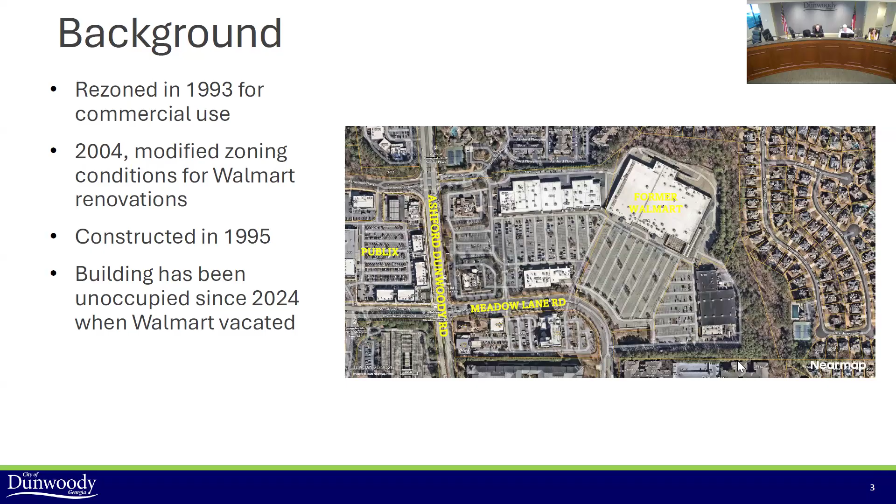So this was rezoned back in 1993 for commercial use. That was when the original shopping center was built and when the original Walmart went in. And then in 2004, Walmart made some renovations, and as a result of those renovations, they modified their rezoning again. So from both 1993 and 2004, there are zoning conditions on this property. The building has been unoccupied since 2024 when Walmart vacated, and due to that vacation, there's now additional interest in the site.

But they're proposing to move into the site almost as is, with a couple of modifications. So they'd be reusing the existing building. One of the changes they would like to make to the site is to modify the front facade. It would just be mainly a paint refresh and changing some elements of the facade to change around the entrances.

The most major change they're making to the front is they're requesting to add a drive-through, which would service their in-store pharmacy. That drive-through lane would be parallel to the front facade of the building.

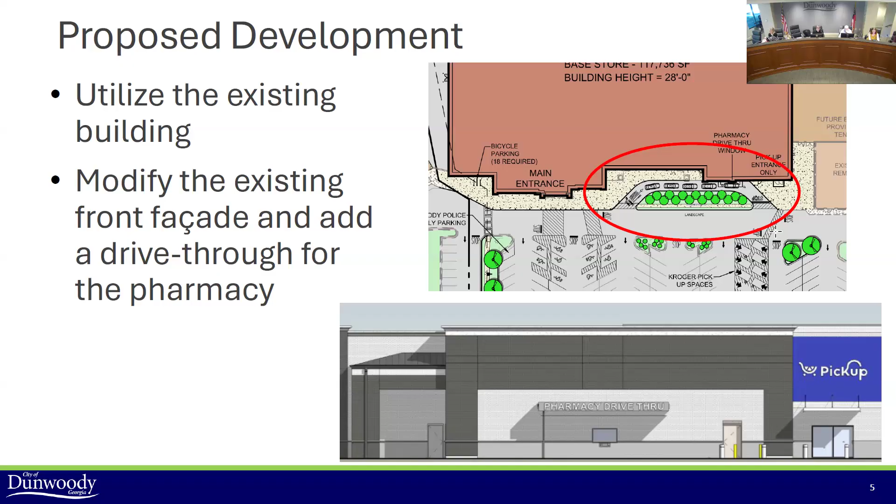I've zoomed in on their site plan just to the front of the building to give a better view of that drive-through lane. It would essentially come in and have a stacking lane with capacity for 5 cars, and then a pickup window covered by a small canopy. It would form a little horseshoe, and a majority of that lane would be screened with vegetation. On the bottom is just a photo of the elevation of what that would look like.

The next part of the request is for the construction of a gas station. This would not be a typical gas station with a convenience store. It would essentially just be a canopy to cover the gas station pumps, with a small kiosk for an employee to have shelter. That's the layout of the gas station, and it would be pulled up closer to Meadow Lane.

If you're familiar with Meadow Lane, it has the sidewalk and then essentially a berm. So up at the top of that hill, pushed a little bit back in front of the Walmart, would be the proposed gas station.

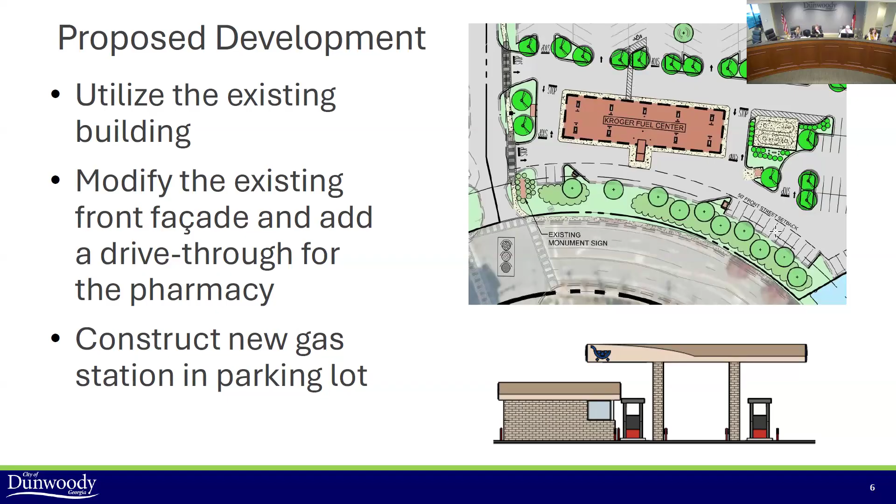They're also proposing to make some parking lot improvements, including new landscape islands, new tree plantings, as well as a new pedestrian walkway from Meadow Lane to the front of the store. There's currently no direct route of travel for pedestrians that's separated from the cars, so we find this to be a nice improvement to the site.

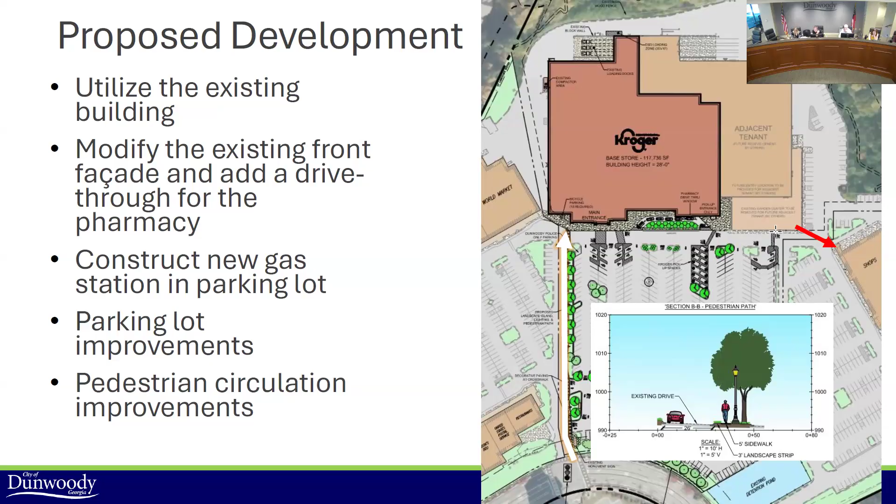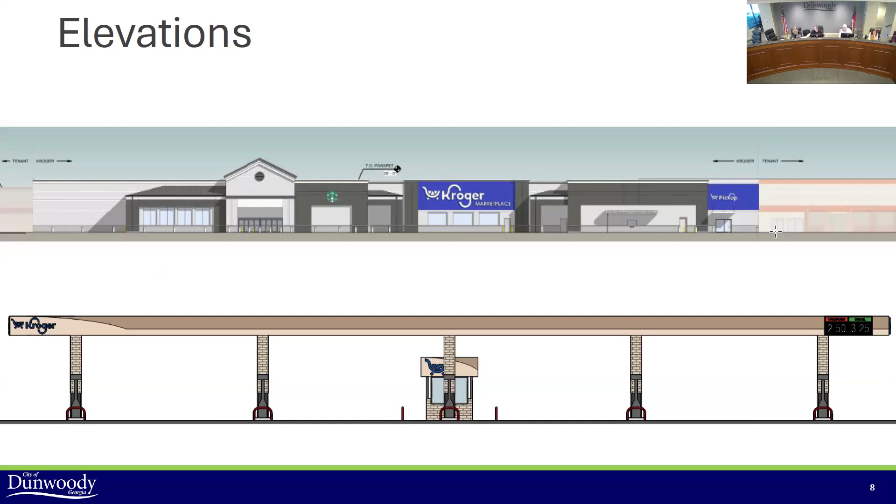So now I want to break down the requests now that we know what Kroger is proposing. Because this has layers of those old zoning conditions from 1993 and 2004, you have certain rules and regulations that dictate how the property can be used. You also have the general zoning ordinance, which requires any drive-throughs to have a special land use permit. Also, because they're utilizing the existing site and not scraping and building new, that's caused some friction with some of our other zoning requirements, so they're requesting some variances as well.

I'll first go over the rezoning, which is essentially to modify those zoning conditions from 1993 and 2004, replacing them with a set of conditions applicable to this project. It would include replacing the site plan, because currently the site plan that dictates this is a little over 20 years old. It would also remove a condition restricting gas stations and just allow the zoning code to dictate what uses are allowed here. The project is zoned C1, and gas stations are allowed in C1 by right, but those zoning conditions prevent a gas station, so they're requesting to lift those.

They are also requesting to remove the time restrictions on deliveries, and to remove parking requirements. The special land use permit is for a drive-through, and the variances are just from general zoning district standards—I'll get into those a little bit more.

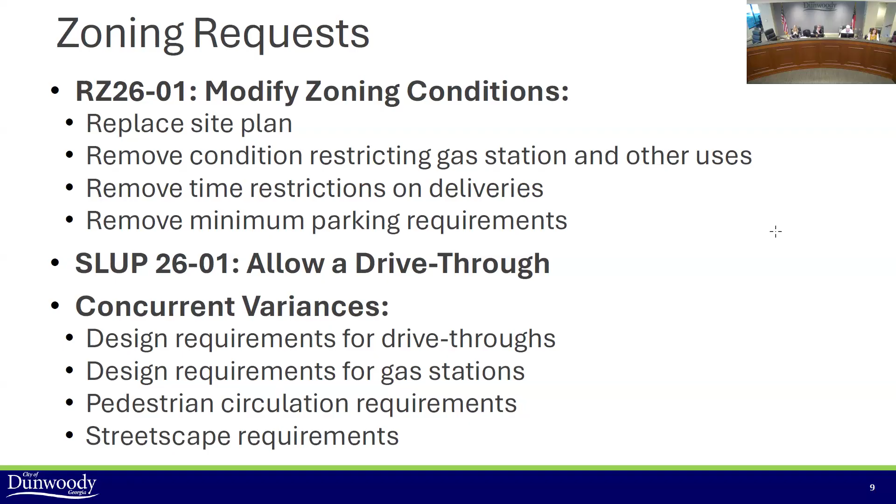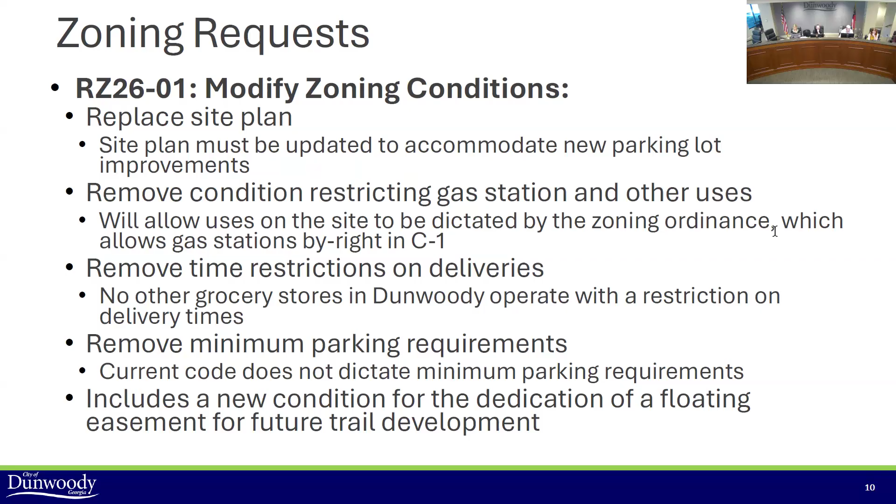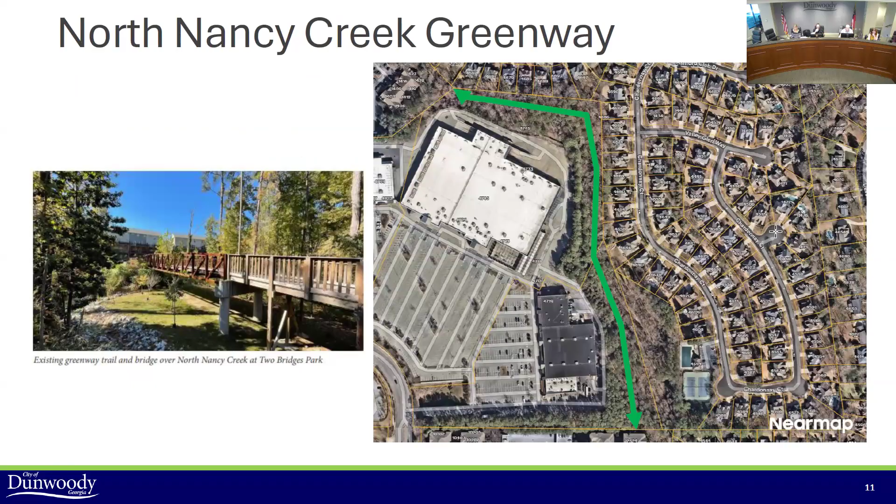For the special land use permit, any drive-through in the Perimeter Center requires special permission. Typically, when you think of a drive-through, it's something like a drive-through restaurant or a bank, and we have requirements to control those, just because those are the types of things that can have impacts on sidewalks and roadways.

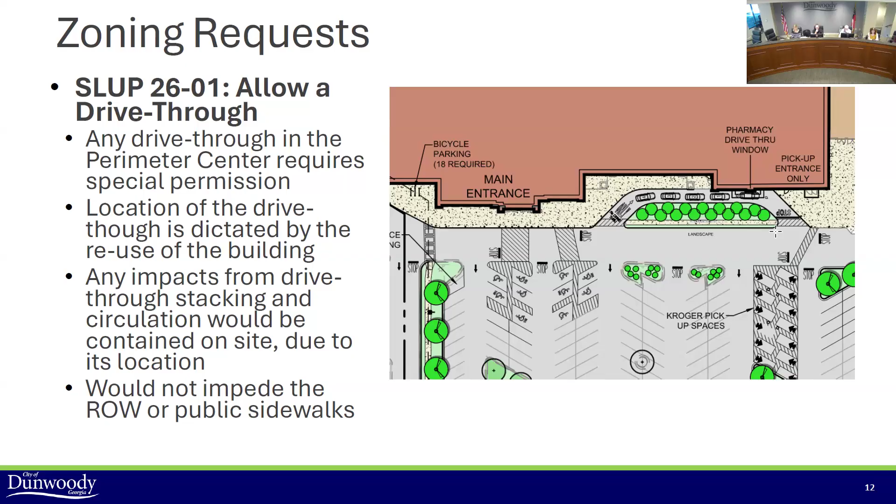Especially when they're closer to the street or adjacent to the street, in this situation we do find the drive-through appropriate. It is pushed back from the street, and we believe the site is large enough to accommodate any adverse impacts. We don't see it impacting the streets or the right of way, and so we are recommending approval on that.

For the concurrent variances, I'll walk through these quickly since there are four. For the design requirements for drive-throughs, our requirements in the Perimeter Center are very prescriptive, predicated on one building type essentially - a freestanding bank or restaurant pulled up to the street - and those requirements tell them to build the drive-through behind the building. But this model doesn't meet that because they're utilizing the existing building, and it just doesn't fit those design requirements. Same goes for the gas station - those rules are predicated on having a convenience store you pull up to the street with the gas pumps behind it. But again, this is just a different product type than what the code anticipates, so they're requesting relief from those items.

We also have pedestrian circulation requirements. They're making significant pedestrian circulation improvements. There's just one part of the site they don't feel they can provide a pedestrian connection for, but they are making some improvements towards that.

For the streetscape requirements - if you saw in the earlier picture, and I can go back to it if needed - this property only has a very small amount of frontage. The shopping center is split into 3 different parcels, and it wouldn't necessarily be rational to require streetscape improvements on such a small stretch of roadway. The Public Works Director acknowledges that, so they're requesting relief from our streetscape requirements, but as mitigation they are providing an easement for future trail development, which would be a great way to extend from Two Bridges Park up to the shopping center.

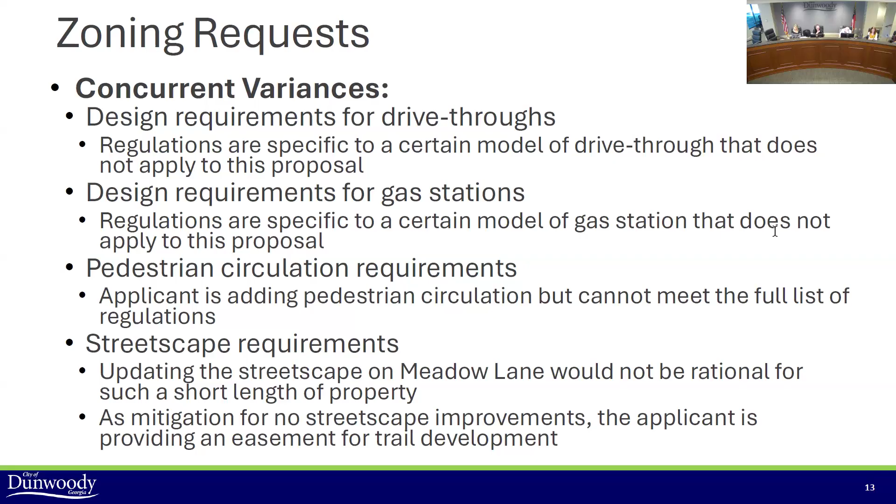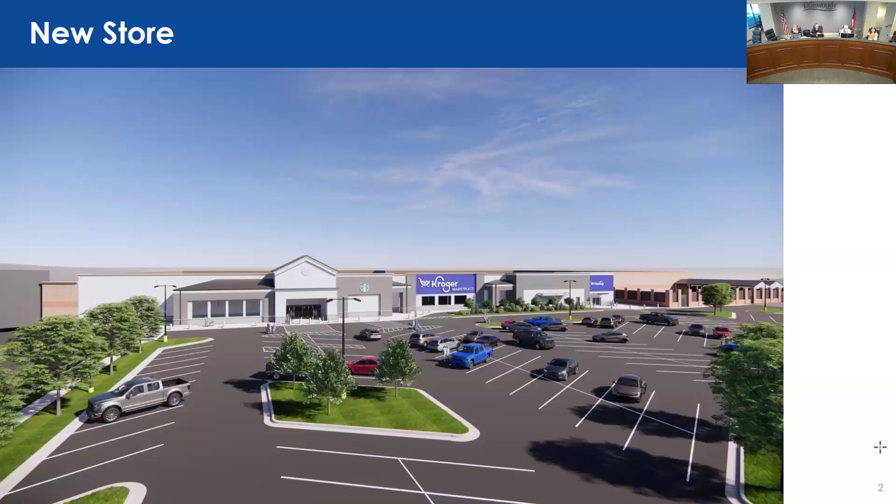Good evening, my name is Laurel David with the Galloway Law Group. I just whispered into Madeline's ear - she stole most of my slides, so my presentation will be quite brief. She covered, as she usually does, most of the things I wanted to make sure got covered, and her staff report, as usual, is very thorough. But there were a few things I wanted to bring to your attention. We have renderings, which she did not have, which I think will give you a better idea of what the finished product will look like as opposed to 2-dimensional elevations.

I also wanted to tell you a little bit about Kroger. This store is going to be a marketplace, so it will have departments that some of the more older traditional Krogers do not have - such as, well, I know my Kroger has plates and kitchen things, in addition to what you'd normally see. There'll of course be a Starbucks there, they'll have the delicatessen with specialty cheeses and meats, and they're also going to have a baby clothing department.

Kroger is also very involved in philanthropic initiatives. They have a Zero Hunger, Zero Waste plan. Since it was devised in 2017, they've donated more than 3 billion meals and donations of in-kind and surplus food to a value of about $1.3 billion in charitable giving. They donate money and food to help establish and support school food pantries and nonprofits that address food insecurity. They also aim to recycle about 90% of their construction waste so it doesn't go to landfills, and they're very active in supporting community groups, neighborhood groups, and nonprofits.

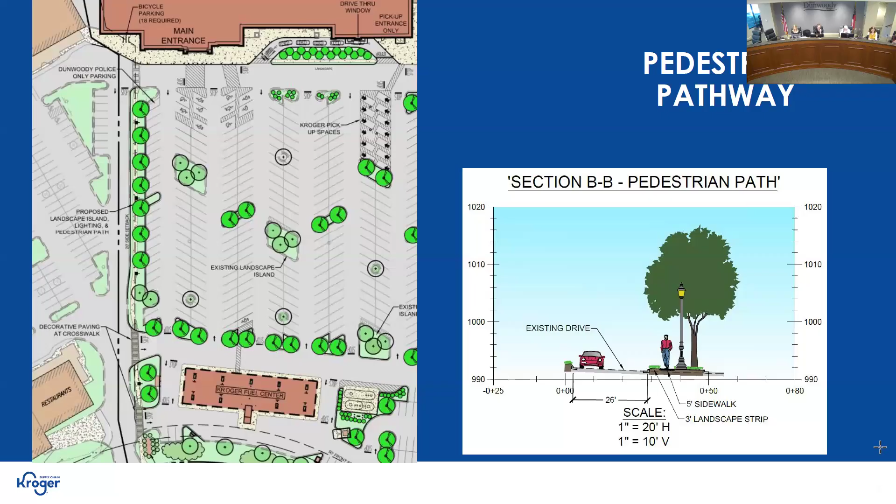With the addition of the landscape islands you can see there, the lot coverage will be about 75%, which I think for a piece of property this size is actually pretty good for commercial development. They're also reducing the amount of parking that's out there now by a total of about 100 spaces - there's 626 spaces there now.

And here's a rendering of the pedestrian pathway. They're also going to have lighting, not quite like street lighting, but that's the idea, to make sure that anybody walking there feels secure and safe.

The fuel center was also designed with safety in mind. You can see the fuel tanks, the oval-shaped circles to the right of where the Kroger canopy is shown in red. Then there's the hashed area that allows trucks to pull over and make their fuel deliveries there. They won't be in the circulation of customer traffic.

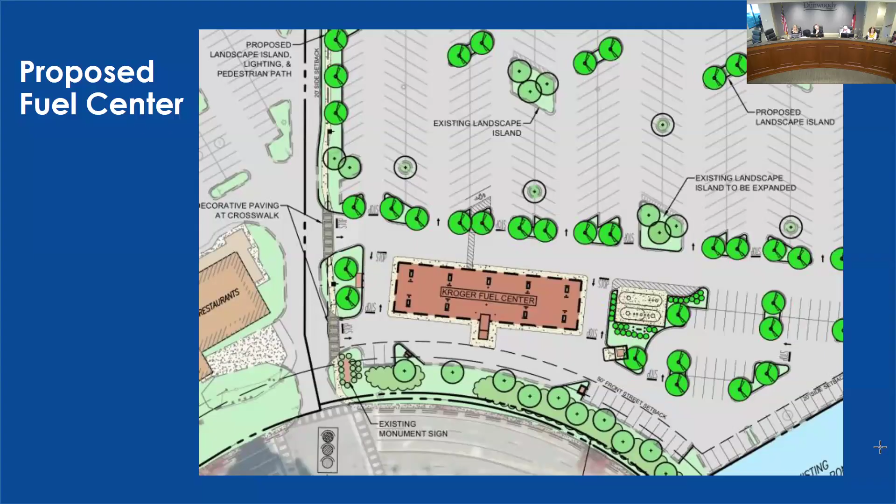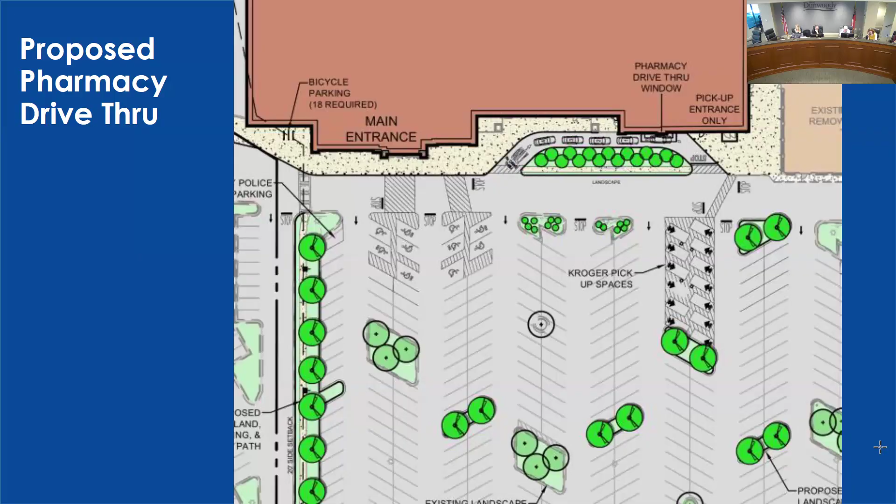The pharmacy entrance was also designed with safety in mind. You can see the way that it is oriented, it's one way. There's clear visibility for cars entering and exiting. There will be clearly marked pedestrian crossings at the entrance and exit. The landscaping is there not just to mitigate visual effects, but also to create a buffer between the pedestrian and the cars in the drive-through. And this is a rendering of that area.

So with that, I'd ask for your support, and if you have any questions. Thank you.

Okay, for the commissioners, do we have any questions for either one of the presenters, starting on my left, Commissioner Cameron?

Yeah, for this, we do kind of like the big questions now. I would say let's do the public hearing first. You want to do the public hearing? Okay, and then the comments.

Okay, then we will now go with a public hearing. First up, Frank, and I hope I pronounced this right, Capon? Am I correct? Okay, all right.

Sorry, Commissioner Moss, let us do this. I think both of the little cards that I handed over to you were in opposition. Let us do this because we have 10 minutes for and 10 minutes against for each one. If you wouldn't mind opening the public hearing first for the people wanting to speak in favor, in case there are any, and then move on to the opposition.

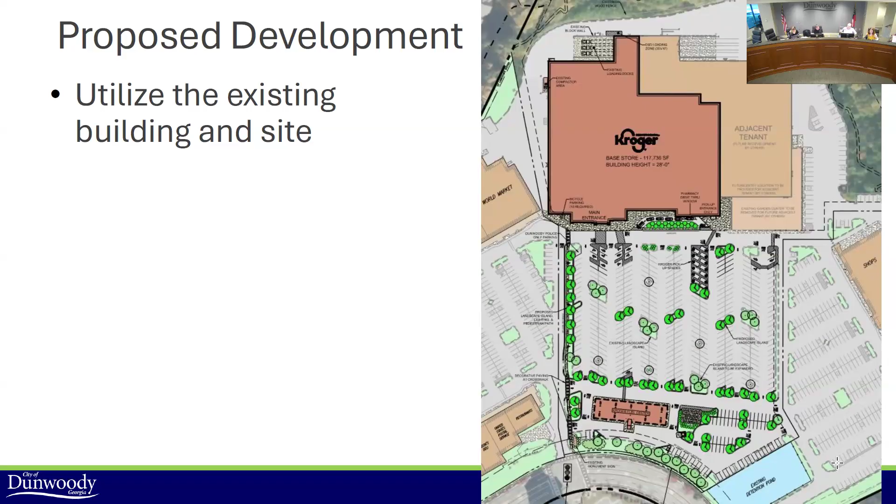Number 3, a motion for the SLUP as well. Yes, I'm going to that one. We've already covered the information on that, correct? So essentially, I don't have to give another presentation unless you guys have specific questions about the special land use permit, but we'll still need to open the public hearing for it. Then you can do discussion and make a motion.

In regards to Special Land Use Permit 2601, I'd like to open the public hearing. That will last for 10 minutes each for for or against. Would anyone like to speak in favor of this special land use permit? Hearing none. Would anyone like to speak against the special land use permit?

Yes, sir. Frank Capek, 4646 Chardonnay Court. This touches on some of the questions you asked earlier. In the event that there are more than 5 people waiting at the drive-through, what happens to the flow? It seems like it will either obstruct traffic waiting on the right-hand side to cross over to the left, or potentially block traffic entirely if people end up queuing beyond the capacity of 5 that there's room for in the lane. It seems like that would be important to get clarity on. That's it, thank you.

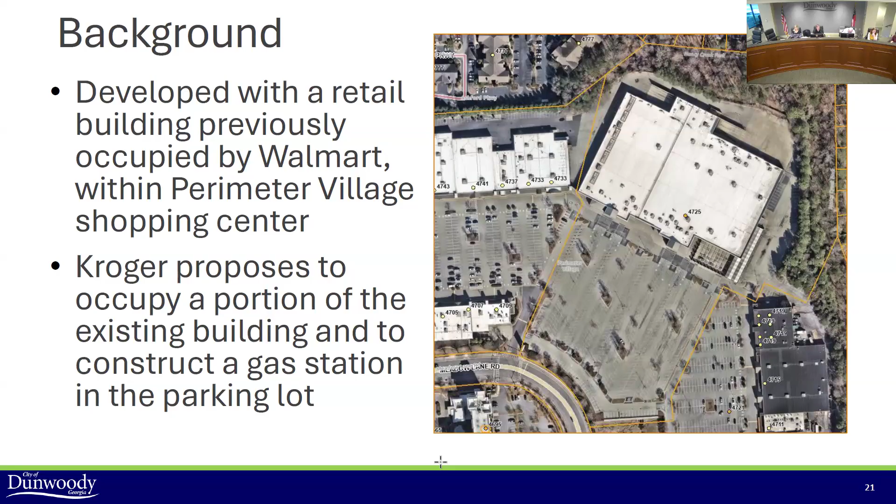So the sign code and the master sign plan will provide the only signage regulations for the property. Kroger is requesting a major master sign plan in order to exceed the maximum count for 2 sign types and to exceed the maximum sign area for 9 individual signs. They're proposing to construct 2 wall signs and 1 canopy sign on the existing building, as well as to add some gas station signage. They're also proposing 3 monument panel swaps on existing monument signs for the Perimeter Village common development and 1 new monument sign for the subject parcel, and none of these signs require exemptions.

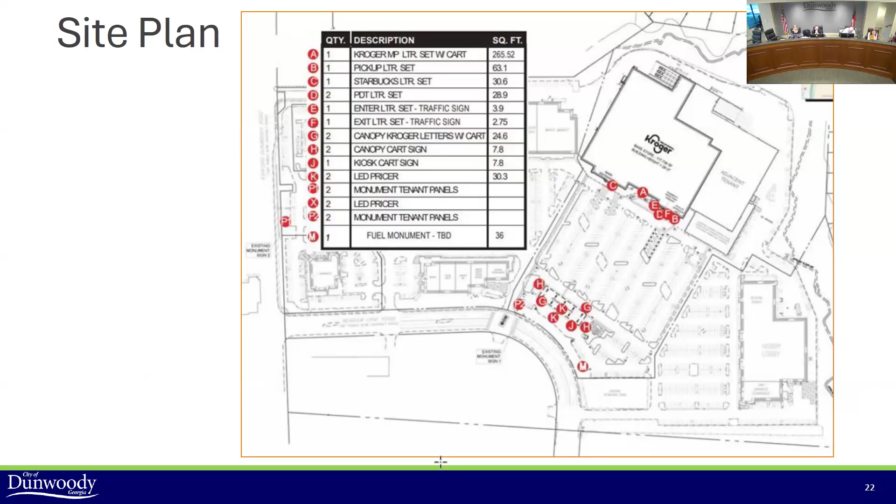So the applicant is proposing to install 2 building wall signs, signs A and B, on the existing building. Sign B is in compliance with the size requirements, but sign A will be a maximum of 407 square feet, which exceeds the maximum allowed size of 180. While large, these signs are very similar to the previous Walmart signage. Additionally, 2 building signs on the same facade exceeds the maximum sign count of 1 per facade.

Also on the existing building, the applicant is proposing a 28.9 square foot canopy sign, sign D, that'll indicate the pharmacy drive-through. The size of canopy signs is determined by the ground floor glazing over which the canopy is located, and this one is not located over any ground floor glazing.

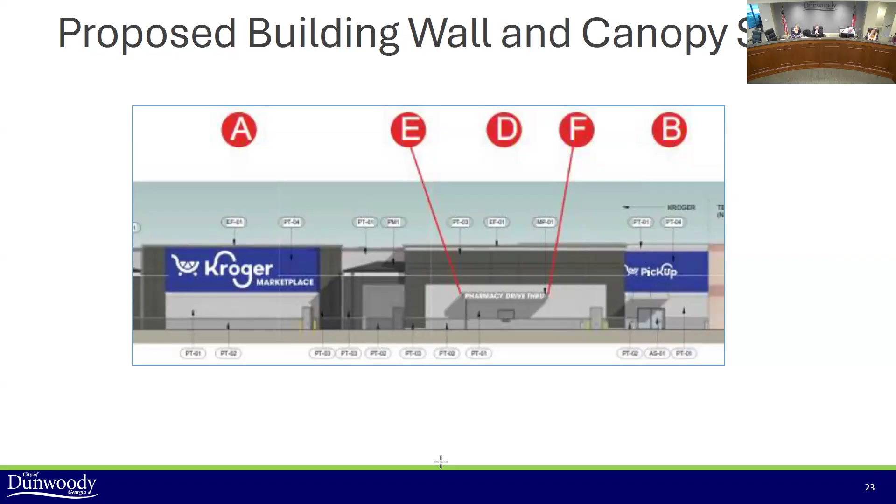As part of the construction of the gas station, the applicant will install 5 signs on the gas station canopy and 2 signs on the pump island. The maximum size for gas station sign is 6 square feet, and all of the proposed signs exceed the maximum allowed, ranging from 7.8 square feet to 30.3 square feet. Additionally, they're only allowed 1 canopy sign per street facade, and the gas station faces only 1 street, so they're exceeding that.

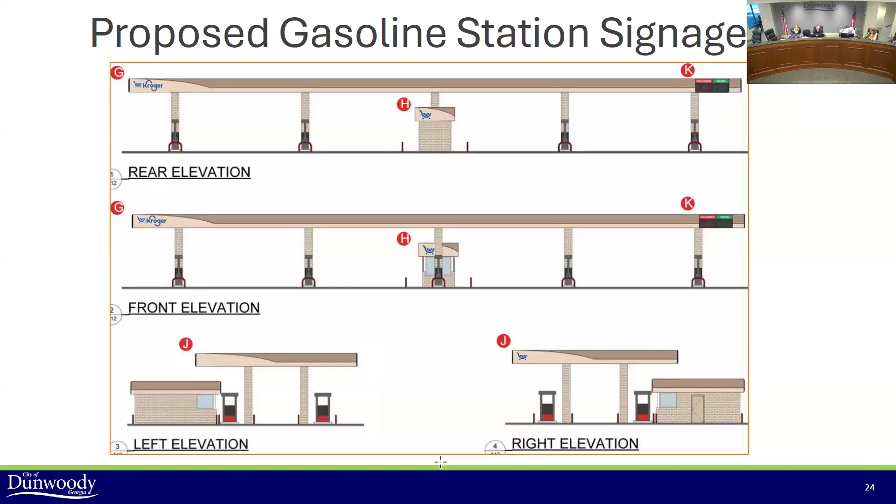So the color scheme is consistent throughout the proposal, using several dominant colors that are paired with complementary accent tones to ensure visibility and cohesion. All of the proposed signs use the same font family and typographic hierarchy to maintain brand consistency as associated with Kroger. All the proposed signage is constructed from durable, weather-resistant materials, and so overall staff finds that the major master sign plan proposal does provide visual consistency with the proposed and existing signs.

The topography of the subject property is a little unusual. The perimeter village common development slopes down approximately 30 feet from Ashford Dunwoody Road to the proposed Kroger building, which really limits visibility for the development. The development consists of multiple buildings with a mix of uses, creating the need for signage to indicate the location of each tenant. The existing building facade is large. A maximum size per sign of 180 square feet would look out of scale compared to the size of the facade.

And as I said previously, the proposed signs on the building are similar to the previously existing Walmart signs. But because of the multiple coexisting uses at a typical Kroger, supermarket, pharmacy, allowing 2 wall signs per facade and a canopy sign that is not located over ground floor glazing will permit customers to navigate the space more easily.

Staff also finds that unique visibility concerns exist for the proposed gas station that necessitate the requested code exemptions due to the positioning of the gas station. Unlike typical gas stations, it'll be surrounded by parking lots and commercial drives, necessitating clear signage for customers entering from those surrounding areas. The proposed signs are of a consistent size and scale to existing signs in the surrounding area. It's located near Perimeter Marketplace and Ashford Lane, and all of those signs are of a fairly consistent size and shape.

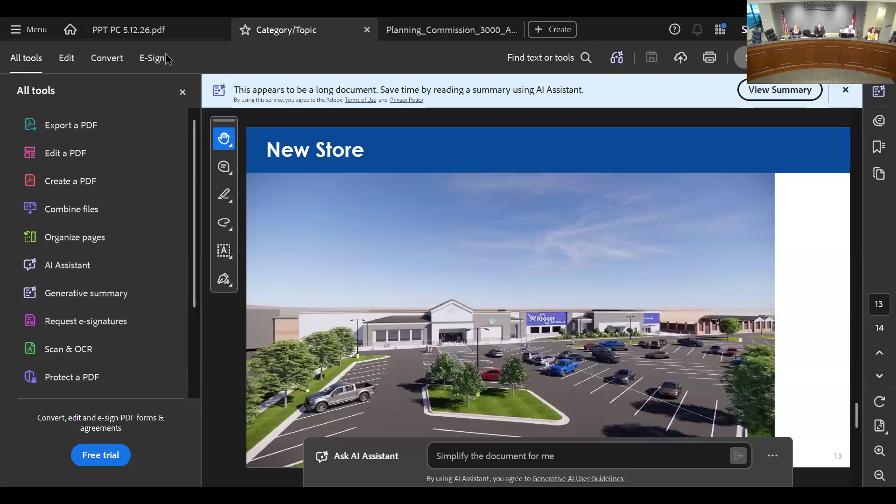Yeah, there was just a couple clarifications. Well, let me start by thanking Allegra for her patience. This version is revision number 6. We covered a lot of ground, a lot of changing things, a lot of meeting in the middle.

In terms of the sign plan, of course, it didn't help that our sign consultant had never done a master sign plan before, so she was very patient with us, and we were able to work out a lot of issues. I know that she pointed out that the big main sign is about the same size as what Walmart had, but I also wanted to point out that Kroger is kind of being penalized by the way that the sign area is measured.

Basically, you get one rectangle. So the word marketplace, because it's so long, is actually extending a huge blank area, which doesn't have any text on it. I was going to try this so you can see what I mean. So it's this area here, if you can see my cursor. The actual, if you're going to take it into smaller chunks, it would be about 260 square feet.

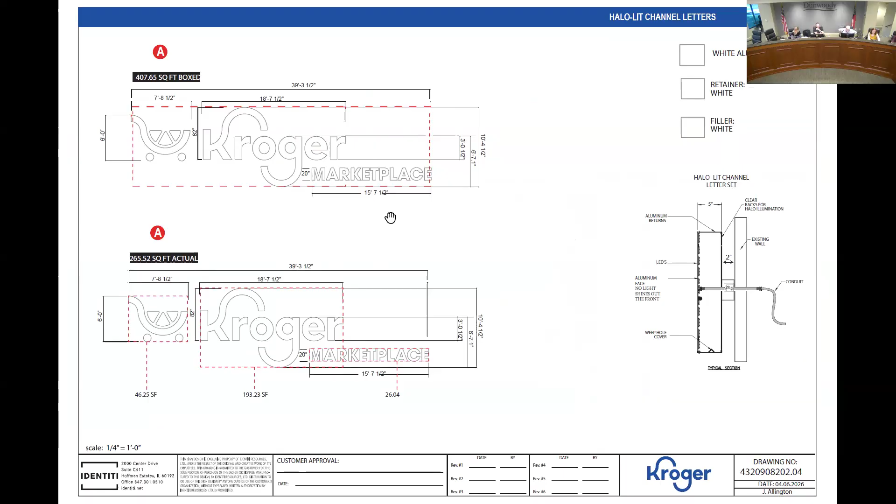As far as the monument sign, I think Allegra may have been out of town. Revision number 6 included a relocation of the monument sign. It's really kind of a placeholder somewhere near that intersection. We found having it down here was not going to fit with the grade difference and with a detention pond right there. But if it is approved as shown on the site plan, it can be shifted at an intersection administratively. We just can't change the complete intersection.

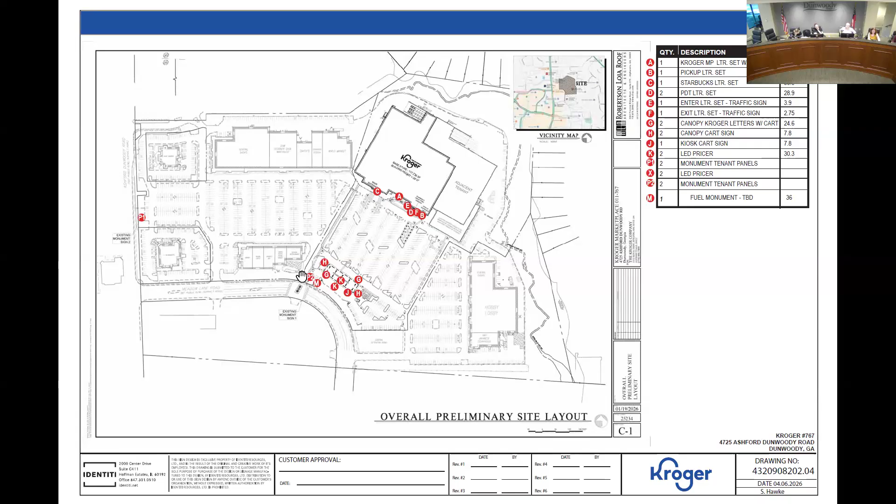And I would like to point out also that the reason for this sign was to be able to show the fuel prices. Sure, there's 2 monument signs out there now that really cover all the tenants, but an LED display or any type of similar lighting cannot be put on those signs. Those are legal non-conforming signs, so all you can do is change out the tenant panels. But in order to get the prices more visible on the street, the only way is with the monument sign.

And of course, we'll work with staff on an appropriate location that doesn't create clutter, and also the appropriate lighting. A shopping center of this size actually allows 10 monument signs, so at the moment there's 3, maybe 4 for the entire shopping center. So I don't really find the argument that there's excessive monument signs credible. We would ask that you approve it without the staff condition and allow monument sign M, please. Thank you.

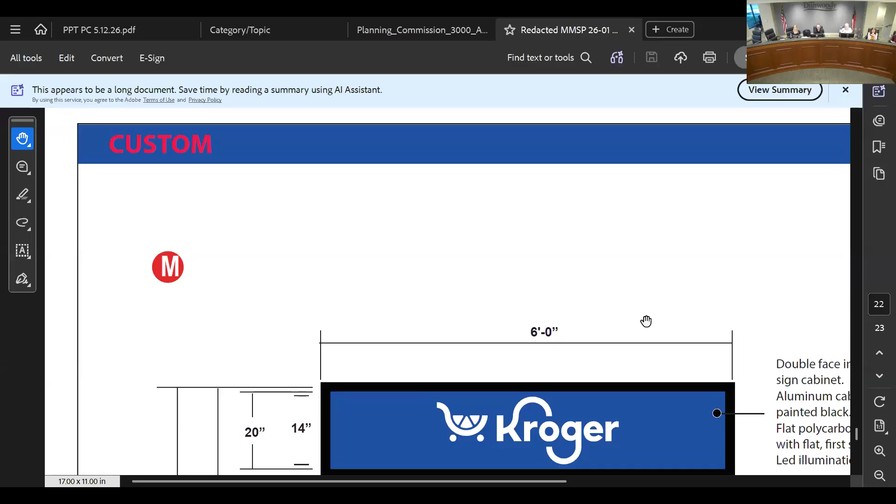I hope I mentioned this, but it probably wasn't clear enough—it's kind of a placeholder there. In fact, I'm not even sure it can go exactly there because there's an electrical culvert box thing there. We would be working with staff to find an appropriate location somewhere near that intersection.

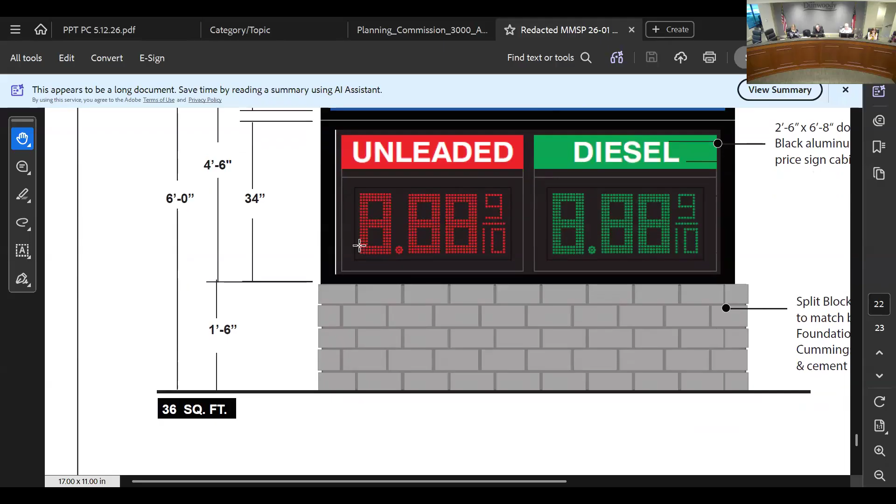Okay, and correct me if I'm wrong, but the signs on the canopy over the gas pumps also have the prices on the signage on top, on the canopy, correct? Correct. They're much smaller though, and I'm trying to figure out how to make this smaller.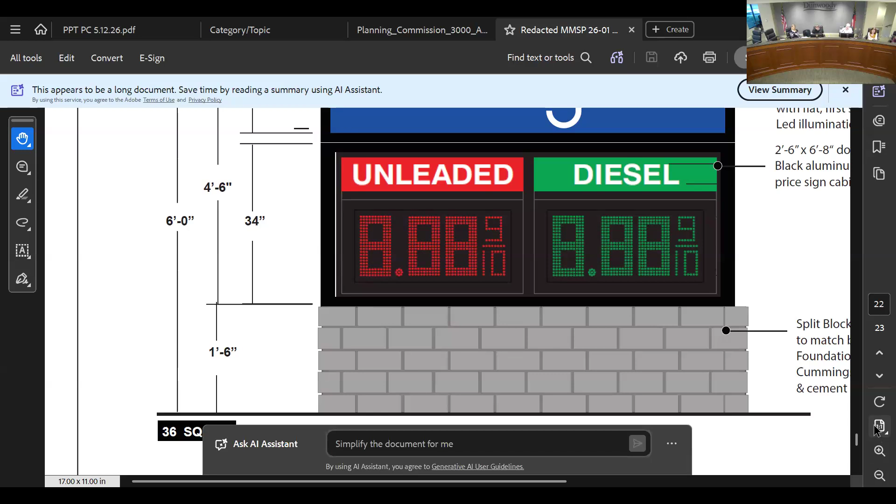Oh, there it is. Great, thank you—who knew you were going to be a computer expert for tonight? Yeah, they're 8x3, the canopy signs, and so you can see them. It's just this little bit up here in the corner.

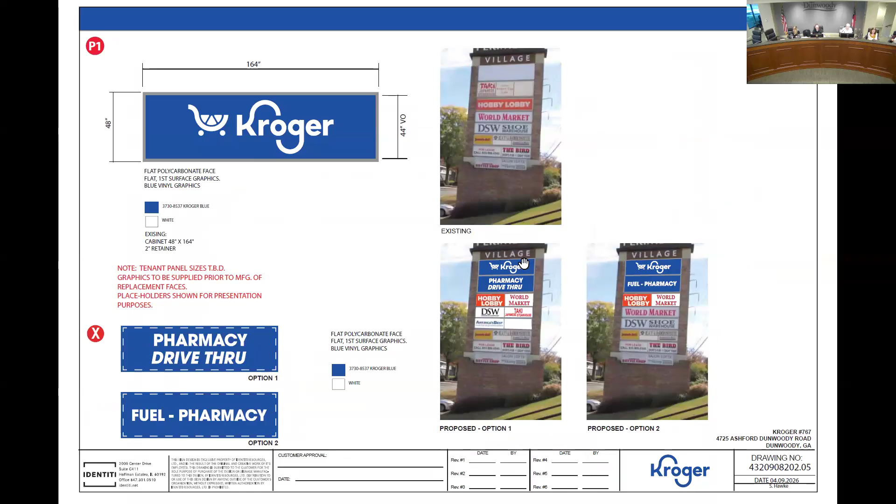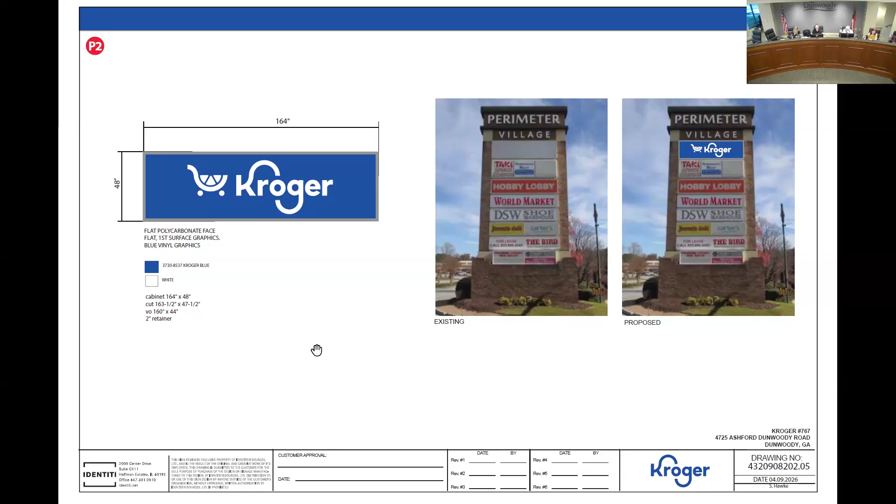And these were the P1 and P2 signs that you were talking about. Here's the existing two alternatives of possibilities of how P1 would change, and then P2—this is the one by Meadow Lane. So actually you can see that they tried to mimic the appearance of that monument sign with their proposed design.

Okay, I think that answers my question.

One question for staff—quickly, we're talking about the internal box lighting, and that was in regards to the fuel price. So if the fuel price is separate, that's EMC, Electronic Messaging Center, and that's allowed. It's the Kroger logo on top of it.

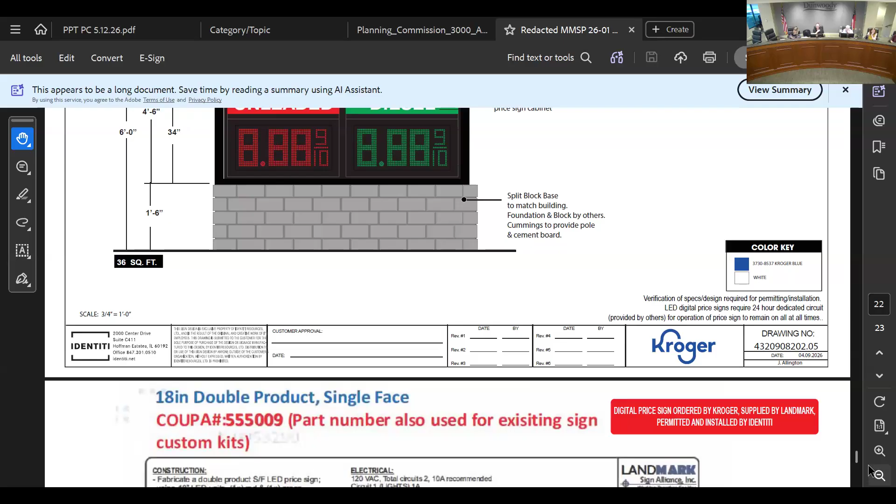And that is removed already, or would that be a condition we would need to make? That would need to be a condition, because there's no way for them to request that exemption. So it would just be something that they would simply need to conform to our code on that. Okay, all right, that's all.

Okay, regarding MMSP 2601, the applicant Kroger seeks a major master sign plan. Do I have a motion? Sure, I'll make a motion. I motion to approve MMSP 2601 for 4725 Ashford Dunwoody Road for Kroger seeking a major master sign plan with staff conditions.

That's good enough, I'll second. Okay, I have a motion to approve MMSP 2601 with staff conditions, and I have a second. Do I have any discussion?

My only question is, can they do something else about sign M, if the Kroger logo is the problem and not the gas prices? I don't know—I just pulled up the QT sign on Street View. I mean, I don't think it's that offensive if they can do something like that. That would be just my only discussion point.

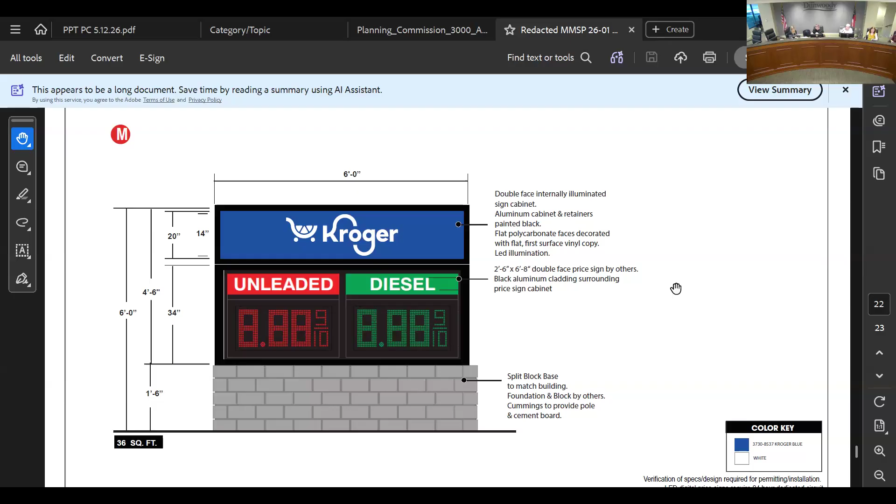Okay, on item number 5—would like to give everybody in attendance who was here for the Kroger meeting an opportunity to leave the chamber at this point.

Madeline, do you want to quickly go with folks and see if they have any follow-up questions? Yeah. All right.

Good evening, Chairman Moss, good evening commissioners. This is a text amendment to the zoning ordinance regarding the public notice requirements. This is after state law changed in 2025.

House Bill 155 was passed and made several changes to the state zoning procedures law. It is a follow-up to something that was before you all two years earlier, a 2023 state law change. That one was fairly problematic, containing some inconsistencies regarding what is considered a quasi-judicial versus a legislative zoning action, especially as it pertains to special land use permits and concurrent variances.